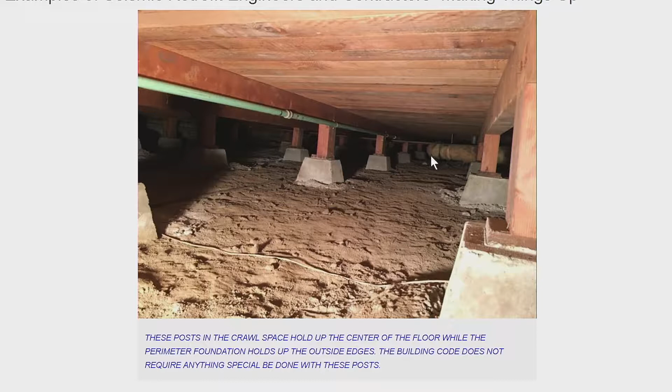So I'd like to discuss something here. These are posts underneath the house in the middle of the floor. Here's the floor you walk on. The perimeter foundation is all along the edges. And these posts right here help support the middle of the floor, and then there's a piece of concrete right here. Now many contractors and engineers retrofit this connection, this post, and I'll show you what they do.

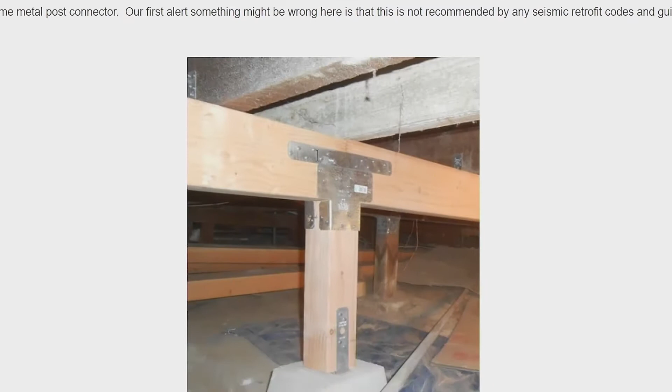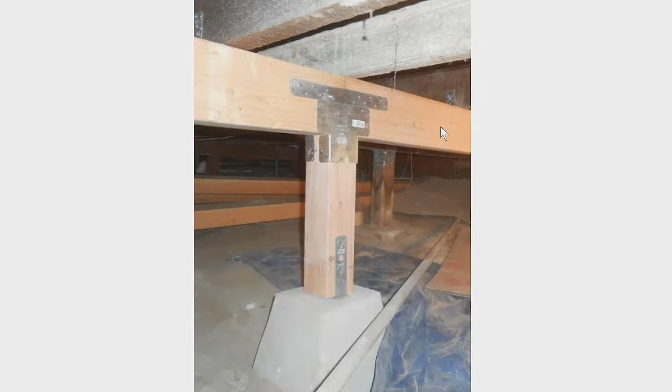So here's our piece of concrete right here. That's called a pier block. Then there's this post right here. And then there's a beam that goes this way, and that supports the floor joist, and then the floor you walk around on is right up here. So they'll put this piece of steel here and this piece of steel here. Sometimes they'll even put new concrete here. Now this is all a complete waste of money.

There has been no damage because of this connection being weak in previous earthquakes. None of the existing seismic retrofit guidelines, of which there are 5, recommend doing anything here. And this is a case of an engineer or contractor making up what they believe is going to be a failure mode. Damage does not occur here. It occurs when the house rocks back and forth, and if the floor above moves, then of course the post will fail, it'll tip over. But if the house doesn't move on the foundation on the outside, you don't have to worry about this. So we'll go over this a little bit more.

So this is a T-strap. This is on top of a post. And so again, it's to connect that girder or beam to the top of the post. And again, this is a complete waste of money. This is not a failure point. This just doesn't happen. So there's no reason to spend money on this. If a contractor or engineer says they're going to do this, you may really question if they have the kind of education in this subject that you would like to hire.

So again, this is another one. Here we have the bottom of a post going into a pier block. Here's a bolt where they bolted it in. And again, this is completely unnecessary, very expensive. So here's an example of a house where the contractor or engineer thought this was so critical that they went and put in new concrete here, they put new steel right here, they put a piece of steel right here, they put them all together.

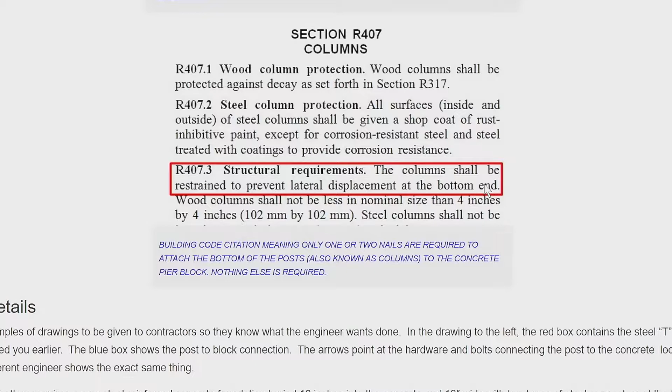And just to show you what the building code actually says, it says here, the column shall be, and this column is the same as a post, the column shall be restrained to prevent lateral displacement at the bottom end. Lateral displacement at the bottom end can mean one nail. So the only thing really required, according to the building code, is just a connection of some type, including a nail. Now remember the parts up here at the top, they don't even care if there's any connection at all. It can just be there on gravity. That's how unimportant this connection is.

So again, if you're going to hire someone, if they recommend this and you like them in every other way, say, hey, I would just as soon you not do this part, and you will not have compromised your retrofit at all. Now I'd like to show you some engineering details that have been put together for contractors to use. An engineering detail is a drawing that shows a contractor where to put the bolts, where to put the nails, how it should be done.

So here we see a drawing, and this is the beam that supports the floor. This is the post. This is the piece of concrete called the pier block. And what this engineer is doing is he's putting this T-strap. We saw a sample of one of them previously. Then there's a piece of steel right here. There's a bolt going through that piece of steel. And then there's some bolts going into the pier block. Again, this is a complete waste of money. And you can imagine how much work that would be, you know, to put in the bolts, get the hardware, drag it underneath the house, etc.

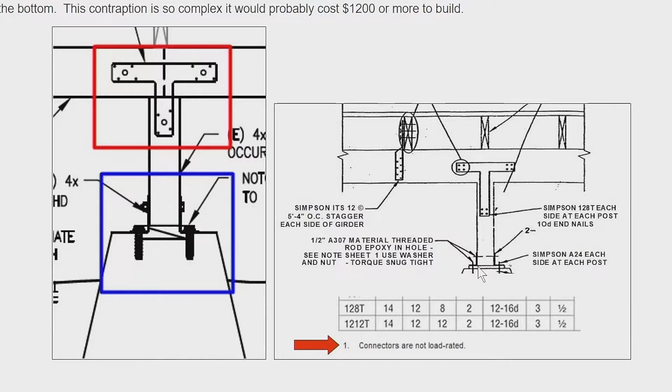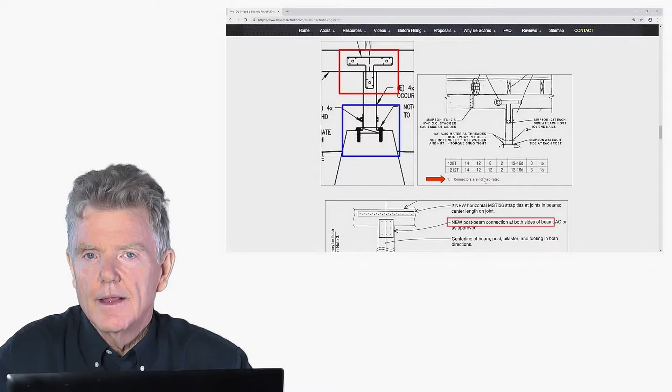This is the exact same thing here. Here we have the T-strap, where we have the post, and down here is where the pier block, the concrete is. Now look at this, it's very, very interesting. This right here, it says connectors are not load rated. What that means is they don't have any resistance to earthquakes at all. They're not rated to resist lateral loads generated by earthquakes. So even the manufacturer's catalog tells you that these are a worthless item.

Now here's one that's fairly complex. I want to show you how extreme some contractors and engineers can be. So the first thing this person wants to do is he wants to put in a massive amount of concrete. So this concrete is 18 inches deep, 18 inches wide. You have to dig the hole out. Then you have to drag the concrete underneath the house. Sometimes you're going to be dragging it 25 feet. You have to do it a couple of times to get that much concrete. So there's this huge amount of concrete.

Then there's reinforcing steel right here, right here, right here. And then there's these big steel bars that go down it. And then there's another piece of steel right here. Then there's our post. Then we have a metal connector right here. That's the top of the post to beam. And then we have a piece of steel right here. So you can imagine how expensive this would be. And if you have 15 posts underneath a house, you can imagine what that would add to the cost.

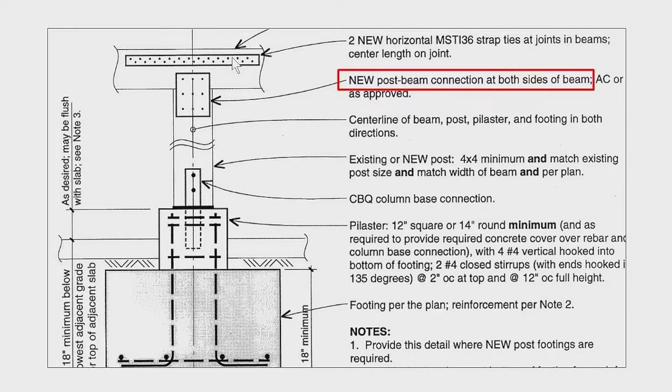This particular retrofit, when we gave a bid, was a 1,200 square foot bungalow in El Cerrito. This entire retrofit was going to cost about $70,000 because this particular engineer did this sort of thing all over the house. So that's why you want to be really careful about what your engineer is planning to do, what the design is going to look like, because you might get something you simply can't afford.

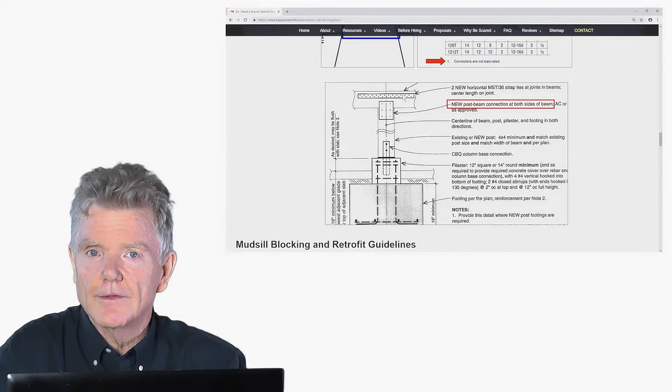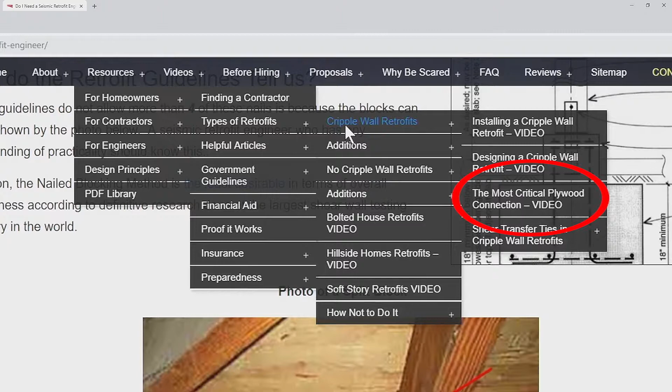Another thing they often recommend is blocks that should be put on the mud sills for the shear walls. What that means can be researched further on our website. You just look up the most critical plywood connection, and it will talk about the importance of these blocks and why nails should not be used. Here's an engineer who recommended putting these nails in. Here we see it again. This is the block right here, and this means use 12 10-penny nails.

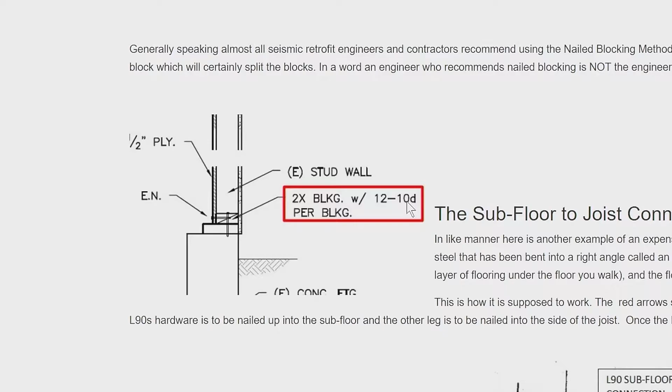12 nails is guaranteed to split a block that small. 4 nails will split it. So for example, this one right here only had 4 nails and it split. You can imagine how what this engineer is recommending here will split it for sure. This is a good example of how an engineer can be stuck in their head. In other words, he'll say, okay, if we put in 4 nails, great. If we can put in 12, then it'll be even better. But he doesn't think about the fact that it can split the wood. In fact, it will split the wood. He's just in the numbers part. So numerically, mathematically, yeah, it would be great. But from a practical point of view, it's completely ridiculous.

So next I'd like to talk about a connection we see in many engineered designs. This right here is the floor joist, and you see that at the top of the cripple wall. And then this is the floor that you walk around on. And what they like to do is connect the joist to the subfloor. So right here, this is a piece of steel. It's obviously a bunch of black lines from your point of view, but this is a piece of steel. And so this piece of steel connects a joist to the subfloor.

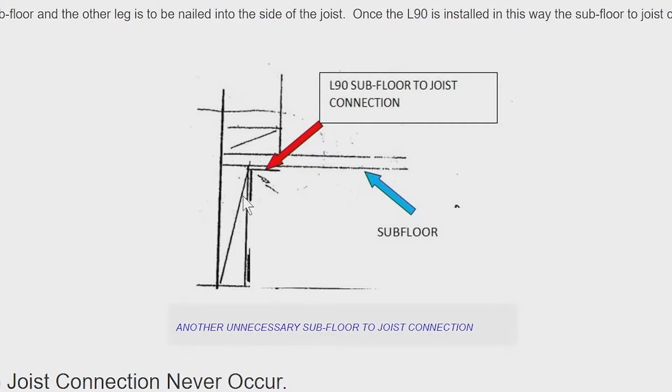Now the interesting thing about this is, number one, that's never a failure mode. In other words, in previous earthquakes, no one ever saw a failure like that. So why would you enforce something that doesn't fail? And again, this goes back to the engineer's imagination. They think, well, theoretically, it could fail. If I were to just assume everything is just sitting there by gravity, of course it would fail.

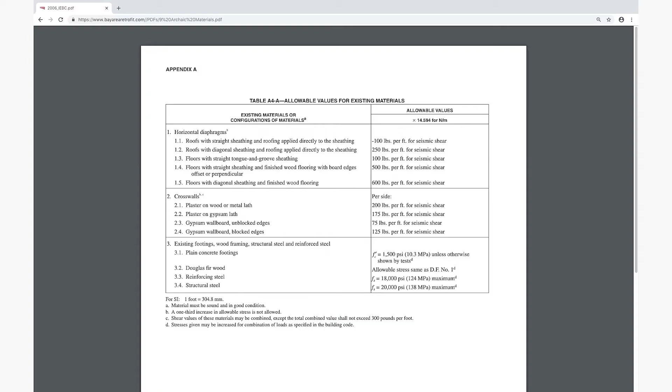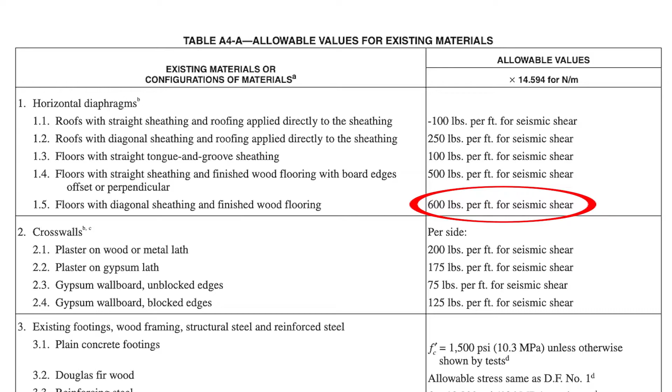Now, if you went to the archaic building codes in the International Existing Building Code, you would find that there's a section there that does talk about this connection and how it is fine as is. This means the connection between the floor joist framing and the floor you walk on can resist 600 pounds of shear force. 600 pounds is 75% as strong as a bolt. Over an entire floor, that's a lot of strength. Augmenting this connection, as recommended by some engineers, is a complete waste of money. But most engineers do not do enough research to discover that sort of thing.

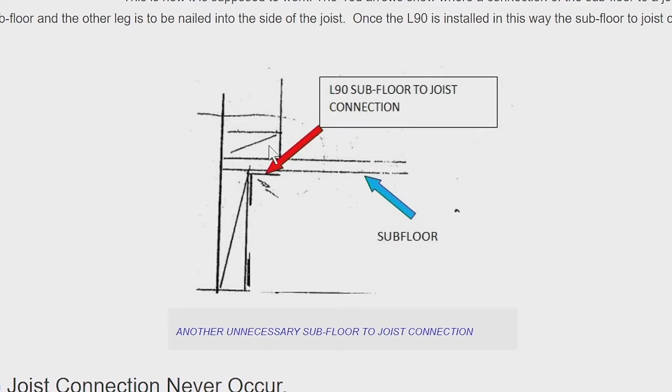So I did do some research on this, and what I found out, if you were to make that connection, right up here, you would need a very short nail. In other words, if you use a nail longer than an inch and a half, it's going to shoot right through the floor. So you have to use these real short nails, and there's a connection calculator produced by the American Wood Council. And when you look at that length nail and the type of hardware, what it says is that the penetration into the wood is so small that it can't be rated as having any value at all.

So what that means is you can do all this work to put this piece of steel in and get no benefit. So why engineers recommend something for which you get no engineering benefit is something that you need to ask your engineer if you see this.

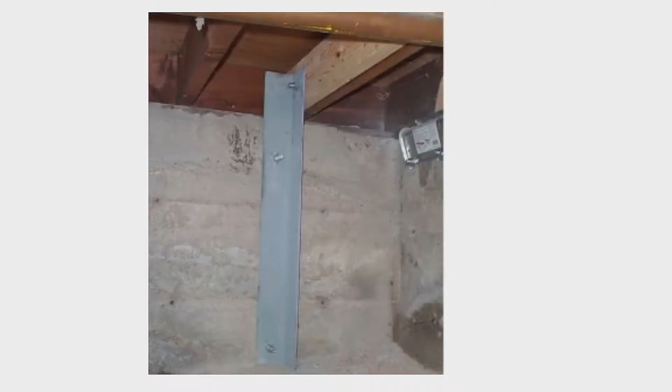This is another thing that's recommended by some engineers. This is called an angle iron brace. If you go onto our website and look up angle irons, I have a whole video on angle irons and how ineffective they often are. You might want to look at that.

This is a very interesting story. A few weeks ago, I was contacted by a possible client, and he wanted to hire us to design and install his retrofit. And what he told me was that he had an engineer come over, and that based on the information he had gleaned from our website, he actually knew more than the engineer, and he didn't feel comfortable at all hiring him. So this is to point out that just because someone has an engineering degree does not mean he understands wood frame seismic retrofit engineering.

That's what you need. So when you interview engineers, you want to ask them, do they have a lot of experience doing wood frame seismic retrofit, or at the very least, wood frame? We have wood frame engineers, concrete engineers, steel engineers, some that design skyscrapers, some that design houses, etc. So the one you really want to stick to is wood frame at the very least.

I hope the information in this video has helped you understand more about seismic retrofitting and how to protect your own home.